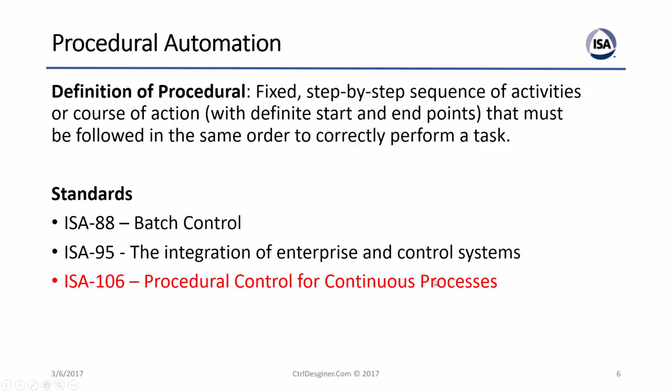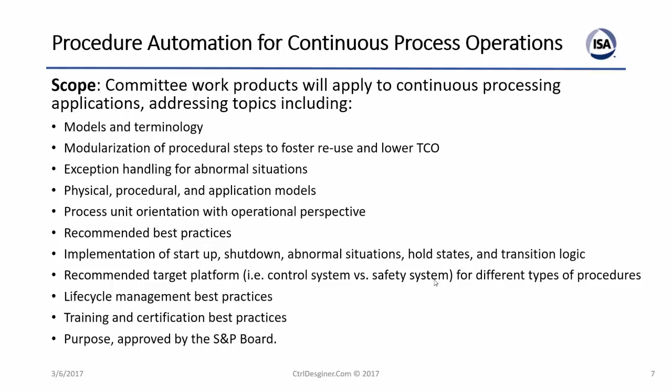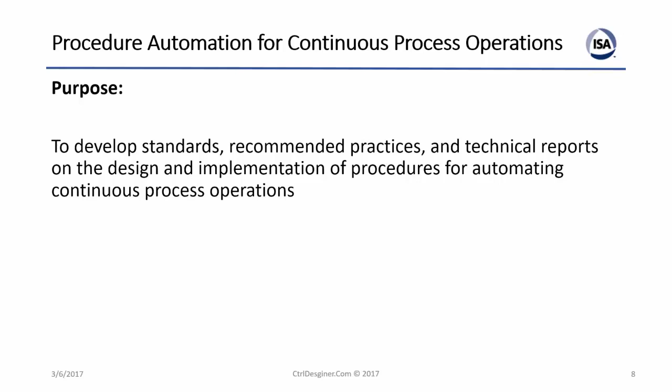And what was the scope of the work? I let you read it. This presentation becomes available, but we wanted to focus on continuous processes, not the batch processes. Therefore, the purpose was to develop standards, recommended practices, and technical reports on design and implementation of procedural automation.

The standard committee consists of myself and Bill Ray, who is the other co-chairman. We have Charlie Green as our secretary and David Emerson as our editor, and our managing director is David Lee. Our past leader, Maurice Wilkins, was our managing director for a number of years, and Marty King was our co-chair before Bill joined us.

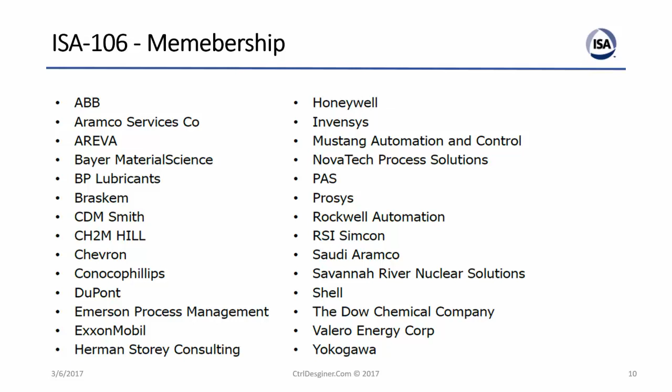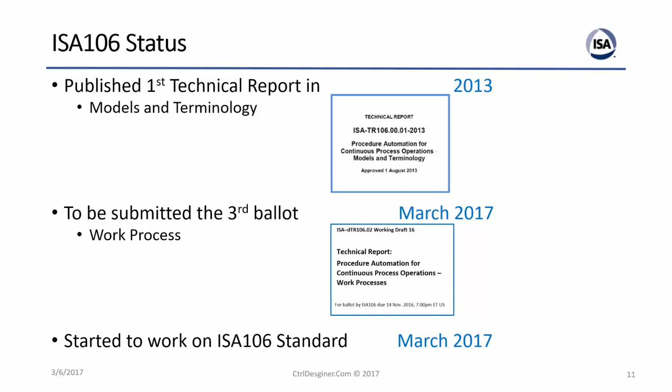We have a tremendous membership from different companies and manufacturers, and what we have done up to now is we have published our first technical report in 2013. Then we are working on the second technical report, which is work process, and it's going to be sent for the 3rd ballot this month. And we have started to work on the ISA 106 standard based on those technical reports and more.

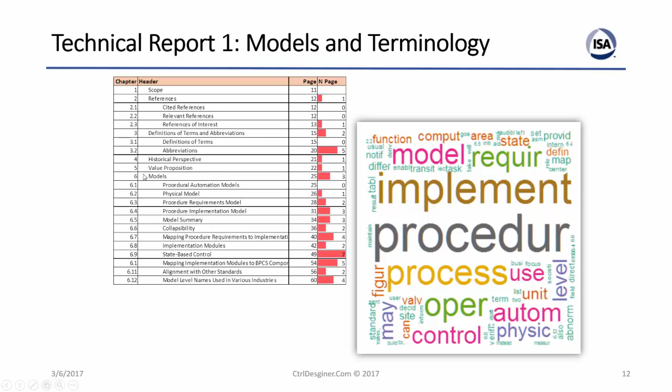Let's focus on technical report 1, which is models and terminology, to figure out how to implement procedural automation. As you can see here, these are the chapters and sub-chapters of the report. And basically, this is our word map of what words are inside technical report 1. And you can see in some areas we have more pages. This shows the page number, and this shows the number of pages for each of the sections. And basically, this report talks a lot about the models and what the models are.

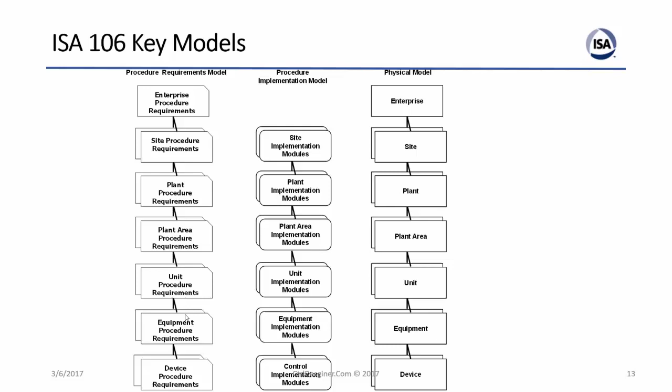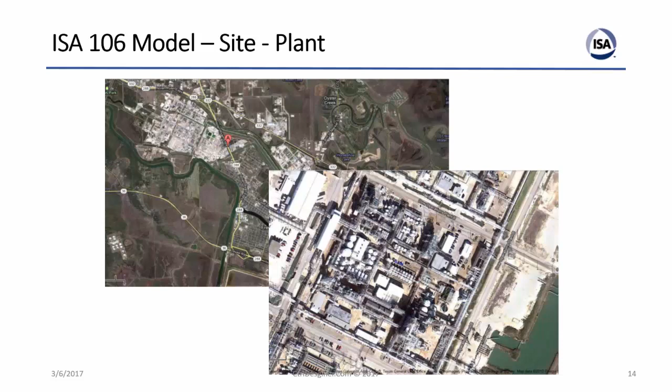We have 3 models: procedure requirement model, procedure implementation model, and physical model. Let's talk about them and see what they are. Let's talk about the physical model. If you look at the map of Freeport from Google Maps and dive into this plant that is being shown here, at the high level we have a plant module, and then we have a plant area module. Then we can divide the plant area model into unit modules, and all of these definitions are provided in our technical report. And then we can subdivide each unit into equipment modules.

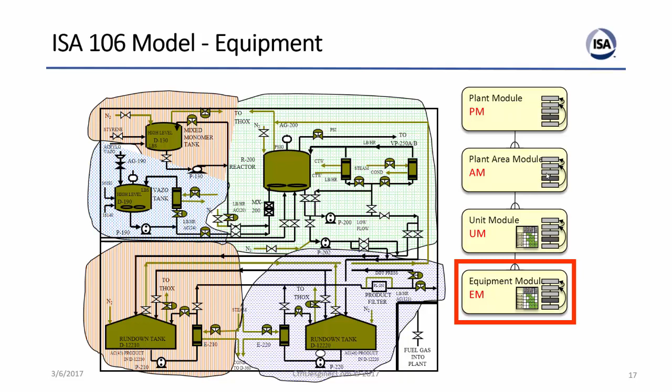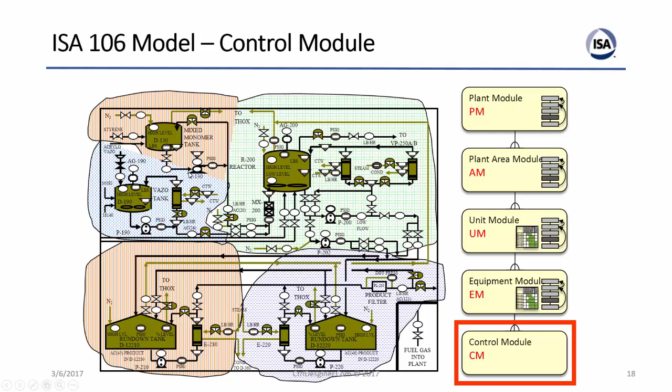And once we have the equipment modules, equipment modules are made of other equipment modules and/or what we call control modules. The control module is the smallest block that the model refers to, for example, a block valve as a control module. The valve and equipment can be a pump with all of its associated I/O. We will talk about these much more in detail.

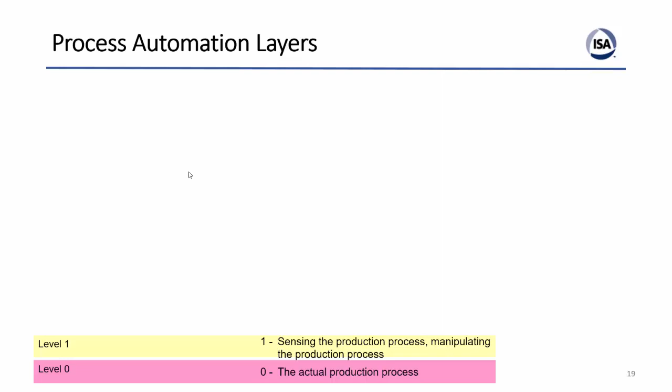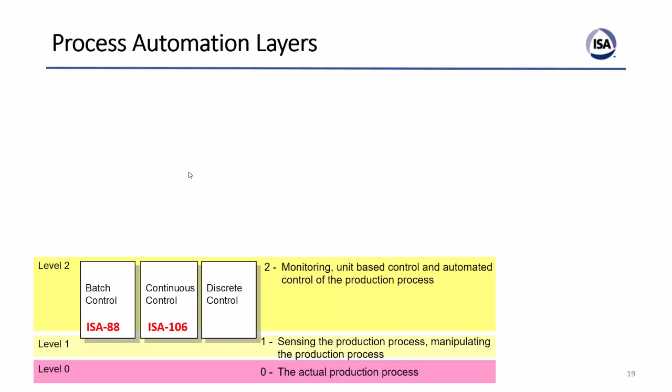If you look at the layers of process automation, the actual process is level 0. Then we have sensors and valves and temperature measurement, level measurements. That's our instrumentation, sensing of the process. Level 2 is where we have process control, and it's divided into batch, continuous, discrete. ISA 88 looks after batch, ISA 106 looks after continuous control.

And then if you go one level up, which is the MOM or MES, it is basically manufacturing operations management. And then when we go one up is business planning and logistics, sometimes referred to as ERP. We are focusing on continuous control in these talks, and this hierarchical system is basically defined by ISA 95.

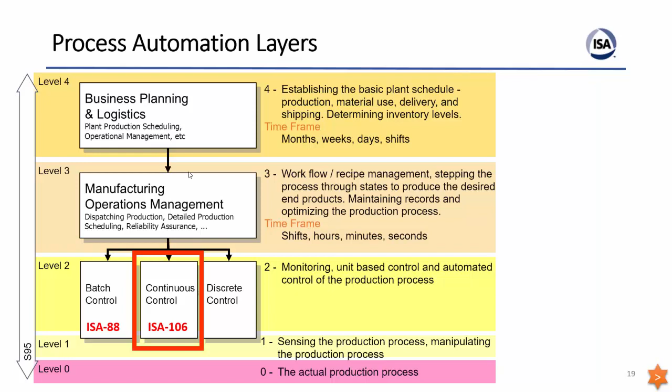But let's talk about batch. Why do we need to have ISA 106 when we have ISA 88? In batch, basically what you can have is a recipe, and you can use unit-based control with a set of steps and transitions. You can make it more complex by having the same UBC but multiple products. Therefore, the recipe becomes very, very important, and we're generating lots of different products.

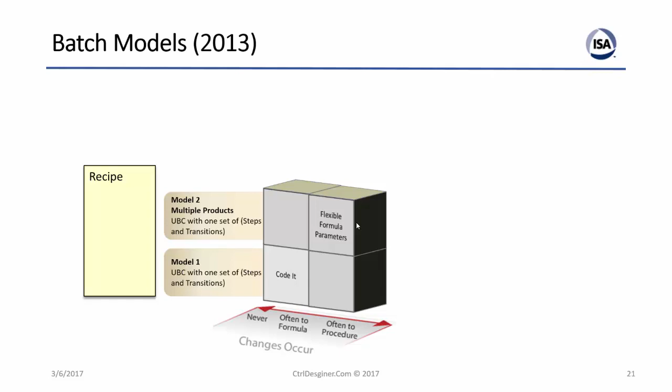We can go one more up, and basically we can have model 3, multiple product, multiple procedure. Therefore, each product has different steps and transitions, and then we need to have a batch manager to manage that. And then 4 is the pathway processing is different. What does that mean? A pump in one production belongs to A, and in another production belongs to B. That's how normally a complex batch is made.

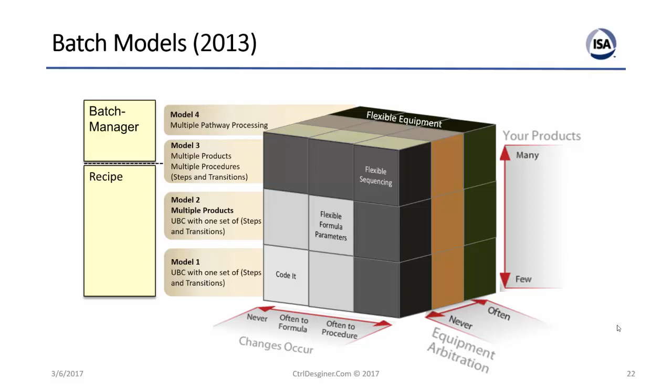Now, if we go forward and talk about the difference between S88 and 106, in a batch, basically the production cycle, if you look at it, is in minutes and hours. We make something and we come back to washing and starting all over again. Sometimes we make more, sometimes we make less. And basically, the production cycle is in minutes or hours.

It's very simple control strategies, pressure control, temperature control, and timing is critical, when you start, when you're going to finish, and then the batch manager commands equipment, not the module. Therefore, the pumps, the valves, are all under the batch manager and the recipe control. And everything is recipe driven and is focused on cycle by cycle optimization.

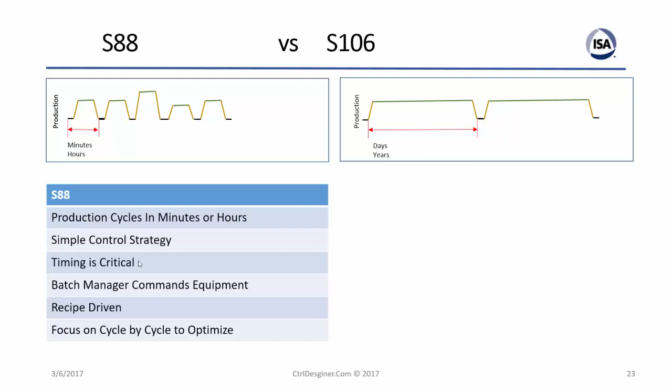Whereas if you look at the continuous processes, normally the startup, running and shutting down is in days or years. Cracking furnaces can go up to 8 years or 10 years before the next startup, shutdown or decoking. It's a very complex control strategy because in an abnormal situation, it's very critical that we don't shut the unit down. And startup and shutdown are critical. They don't happen too often, but you cannot train your operator when your furnace comes down every 8 or 10 years. Therefore, you need to capture your operating discipline as a part of your unit procedure.

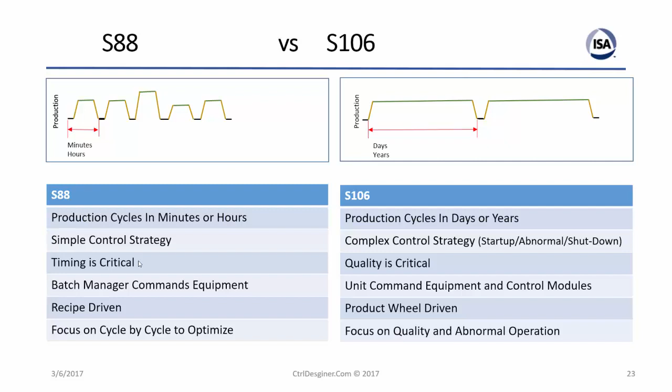Quality is critical. The unit commands equipment and control modules, not the batch manager. And it's product wheel driven. Sometimes in your polyethylene plants, you make one product and then another product, but steps and transitions are the same. Set points might change. And it's focused on quality and abnormal situations.

Therefore, if you look at it, S88 has a batch manager with the UM there, but the UM doesn't do that much. The batch manager talks to EMs, talks to control modules, and talks to equipment modules. Whereas in ISA 106, the UM is basically the driving force talking to EMs and CMs.

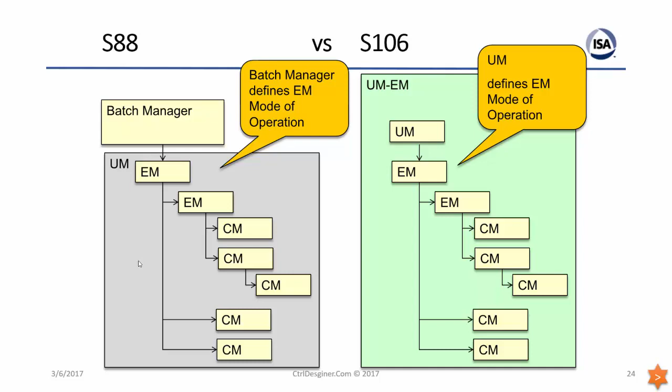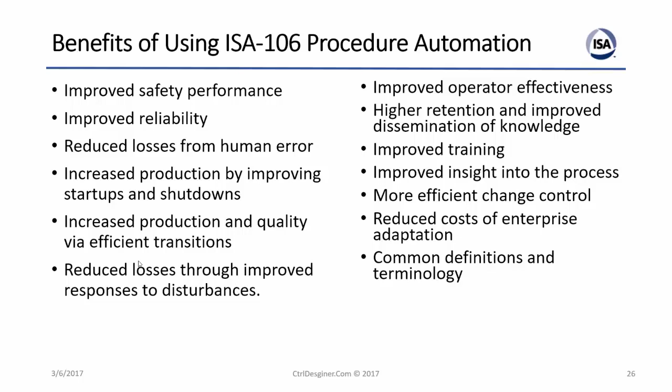Where are the targets for us? Refining, petrochemical, polymer, and furnaces. And there are lots of benefits that we can show, and there are lots of papers published by Yokogawa, ABB and others showing the benefit of implementing ISA 106, and I'm not going to cover those. But let's focus on some principles or requirements for ourselves.

When we are writing code, we need repeatable, optimized startup, run, and shutdowns. Whatever we do this year to start a distillation, 5 years down the road is the same procedure, same timing. We want to do abnormal situation management. If a feed composition changes or if the pressure goes up, we don't want the operator to come and take control. We want the system to take care of it.

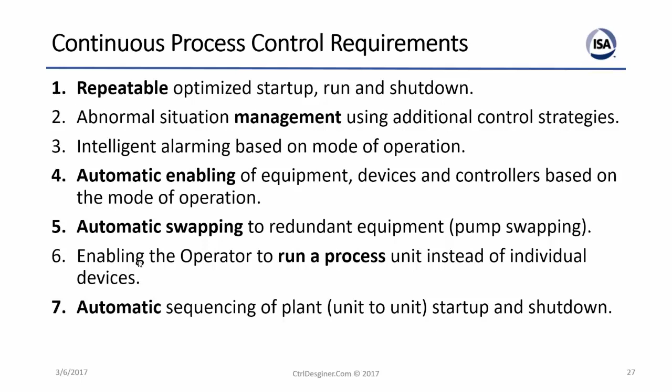We want intelligent alarming based on mode of operation. We want automatic enabling of equipment, devices, and controllers based on the mode of operation. Automatic swapping of pumps, for example. We want to enable the operator to run a process at the unit level instead of individual devices. And we want to do automatic sequencing of the plant. The order is very critical, which one is the most important.

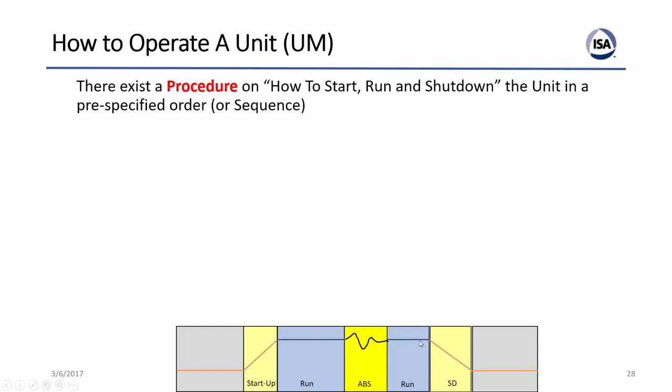Therefore, if you look at how we are going to operate a unit, basically we start it up, we run it, and we might have some abnormal situation. We run it again and we shut down. And this time is months, years.

Therefore, if you look at it, the procedure for how to do this for every unit operation, for every distillation, every furnace exists. We cannot run a chemical plant without these procedures. Therefore, if you go with loop-based control, the operators need to identify when to start, identify these states that we have, then wait for the next steps and execute the command. Therefore, the operator is in charge.

Therefore, the operator needs to worry about all of this, where it is and how everything works. And he or she might have multiple units to take care of. And there is a dilemma. In the old days, we had these controllers mounted on a board. They were very expensive, and we were very limited. Now we have very simple and very good instrumentation. We have a computer to write these controllers, but we still go back to the simplistic controller strategy instead of the one I'm proposing.

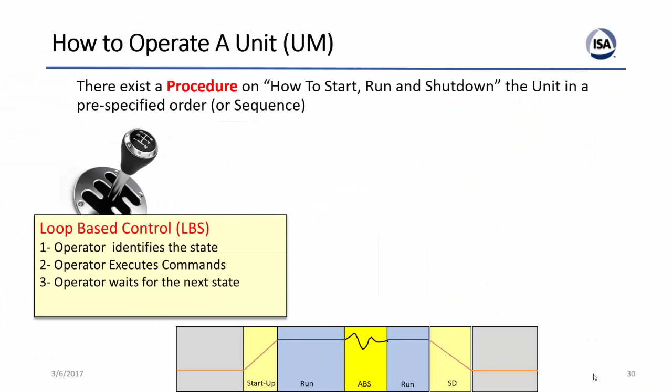The first thing the operator needs to do is establish bottom level. What does that mean? Opening up the feed flow controllers and filling the tower to some level. Then we need to establish heat: add steam to the reboiler and boil the stuff up until we fill this drum, then we set the reflux on and fill these trays. Then we go to total reflux to establish some sort of equilibrium, then we go to run, and then we shut it down. These are the states. States are universal; the definitions might be slightly different, but they exist for every unit.

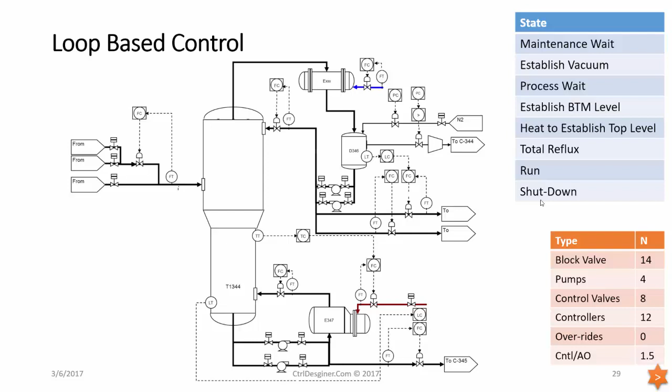Now, another way of looking at this is state-based control, sometimes referred to as unit-based control: the SPC identifies the state, the SPC executes the command, the operator permits predefined transitions, and the SPC observes for the next state. It's similar to driving a car with a stick shift versus an automatic. The automatic defines what gear we are in.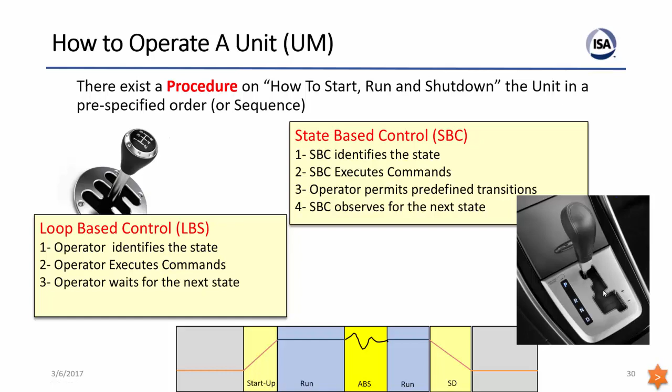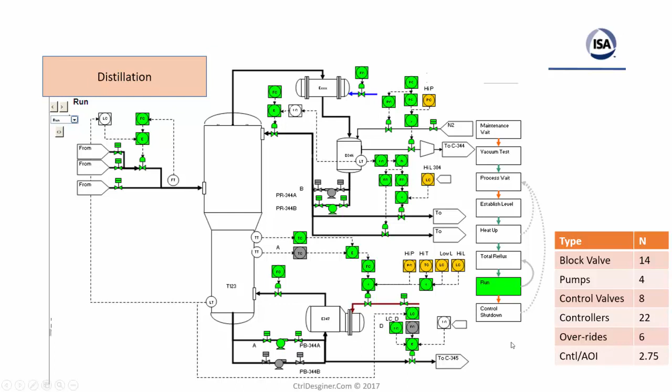Now, this is the same distillation, but implemented with state-based control, or procedural control. It has more controllers. Why? It has 22 controllers instead of the 12 we had before. On a base of 8, we have a 2.75 ratio of controllers to I/O. It would be good for you to check your process and see what your ratio is. Don't count the selectors: number of PID controllers divided by number of control valves.

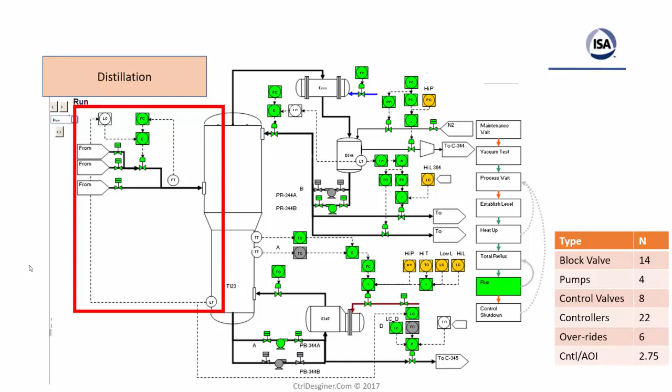So basically we have this complex control strategy, and let's just talk about this one. We're taking the level, and remember, one of the things we want to do is fill the tower up to here. This level signal comes to a startup level controller, which goes to enable selectors and controls the valve. This flow controller is not active at this point. So this is the strategy: an LC startup controller, a feed flow controller, and enable selectors.

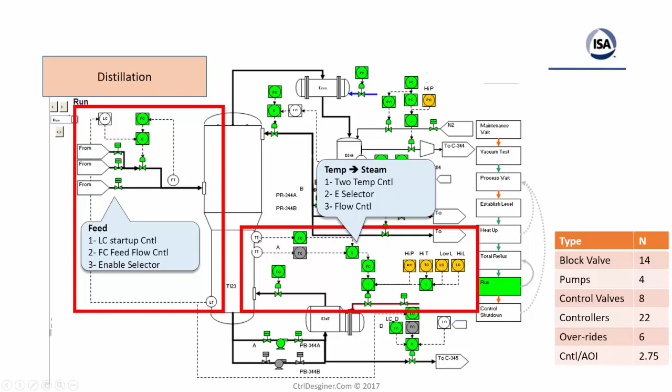What we have here is two temperature controllers. This is very useful because sometimes to control this temperature, if this is our desired temperature, it's very difficult because the top temperature controls the steam and you have lots of instability and problems. So what we do is start with the lower temperature using this enable selector, and then we move up to this one once we establish a better procedure. Then we flow control, and then we control the valve.

Now we have a number of controllers as override controllers for those abnormal situations we talked about. We have a high pressure override - if the pressure of the tower goes up, we cut the steam. We alarm, but we cut the steam. If the bottom temperature goes high, we cut the steam so we don't create polymers there. If the bottom level goes too low, meaning we're evaporating too much based on the temperature controllers and others, then your pumps are going to shut down, so we cut the steam. And if the level at the top goes high, we're going to cut the steam. I have 3 controllers here that go to low selectors, then the result of that and the high pressure goes to a low selector from the flow, and then we control the valve.

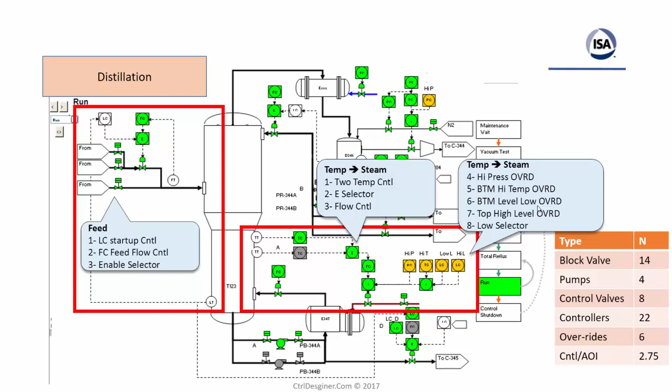These are abnormal situation control strategies that I refer to with yellow color.

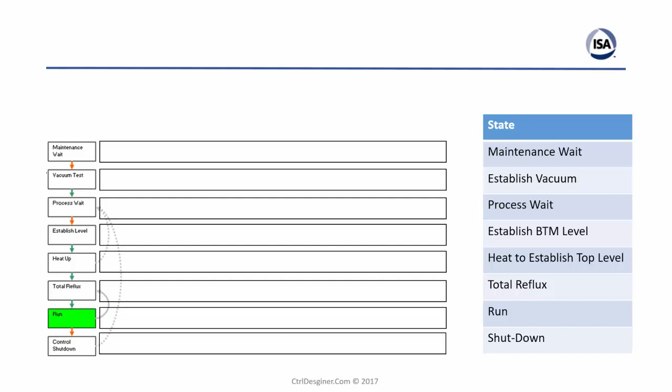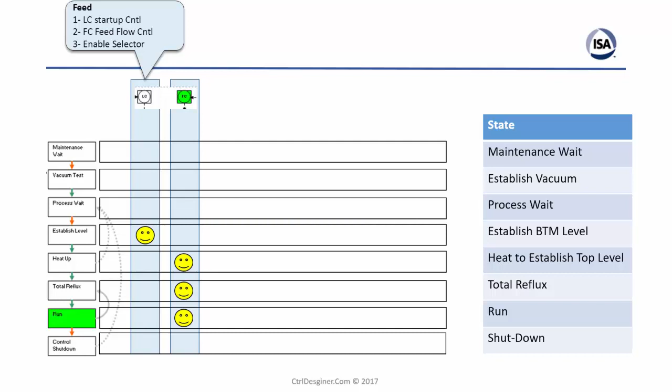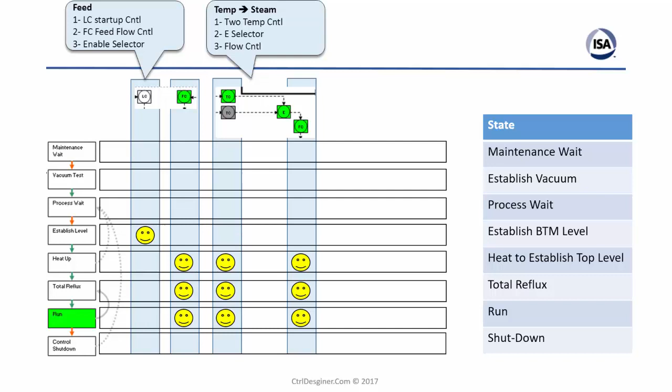Now if you look at the list of states or steps that we have here, and then look at this controller strategy - the level controller needs to be enabled only when we are doing establish level, and then it goes away. The feed flow controller should work during heat up, total reflux, and run. Total reflux - sometimes you don't need it, you need to cut it back, but let's assume everything works. The temperature controllers controlling the steam work all the way through heat up, total reflux, and run. The selectors and flow controllers are basically the same. And all of these override controllers come in at heat up, total reflux, and run, because otherwise there's no steam to control.

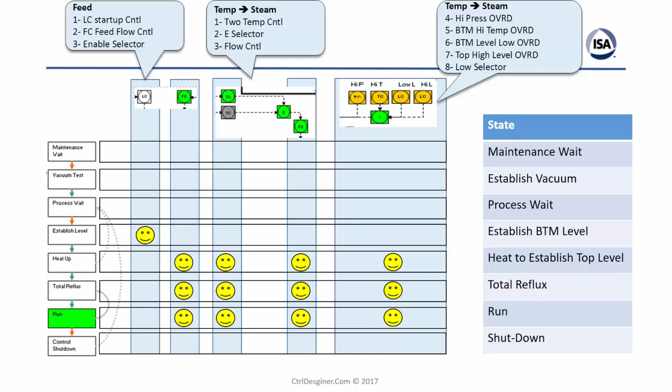Therefore, we need to come up with this matrix, and you'll see an example later on - this matrix basically tells each individual CM or complex CM whether they are enabled or not enabled. The same thing applies for all of the alarms associated with this CM and complex CM.

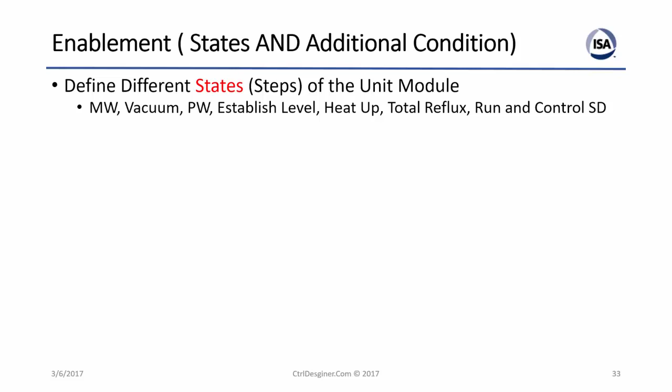Now, how do we do this? How does this enablement work? We need to define different states or steps of a unit module. In this case, we have maintenance wait, vacuum, process wait, established level, heat up, and so on.

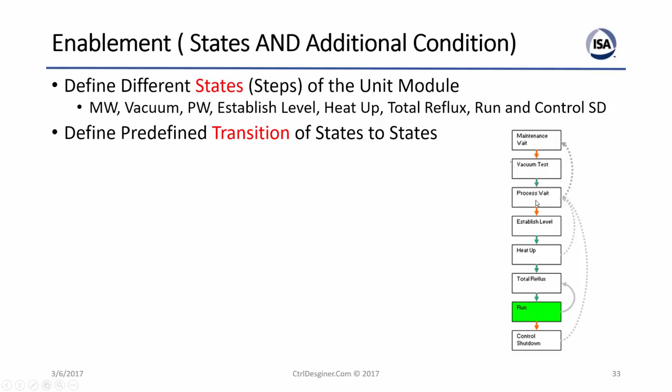Define transitions. So what we have here is we say, from run we can go back to total reflux, and from total reflux we can go back to run. But from run, I cannot go to maintenance wait. From run, I can go to shutdown, but from run I cannot go to established level. There's a pattern - we go straight down, but if something happens in process wait, we can go to maintenance wait. From heat up, we can go to process wait. And from shutdown, we can only go to process wait and then go to maintenance wait. We'll talk about this a little bit more.

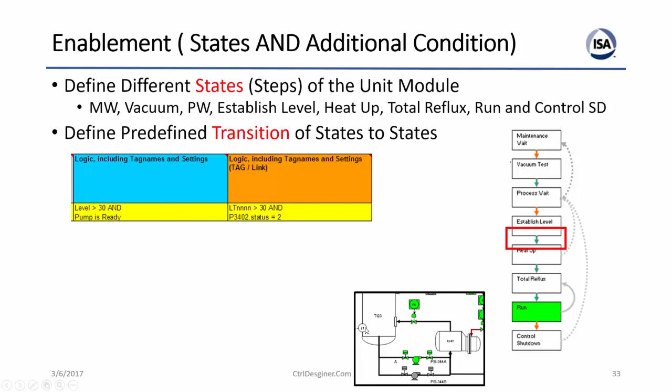The other important thing is we need to identify what the transition is. When we have a step, the transition is basically all of the common logic for all of our pumps, block valves, and controllers that enable us to go from established level to heat up. What does that mean? The level should be greater than 30% and the pump should be ready. If we have these two conditions, the system should automatically go from established level to heat up. So we turn the feed on, we fill the distillation, and when it reaches 30% - simplistically, for 1 or 2 minutes so we don't get noise - then the pumps are ready, and we go automatically to heat up.

And then for each CM's enablement, we need to tell each CM, like this pump or this block valve, at what step you are, because transition is instantaneous. In one second it happens, then it goes off. But we're going to tell this pump that when you are in heat, or total reflux, or in run, you can be enabled. And then we have an additional condition that all of the instruments are okay.

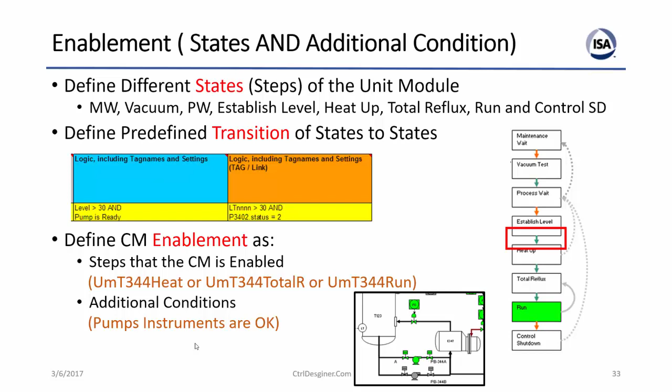Therefore, the enablement of the CMs is divided into two parts: what steps, and then what additional things are needed. If you look at this, that's a step. But then there's another situation where we have steps and then we have an equipment module. Equipment module can have its own steps.

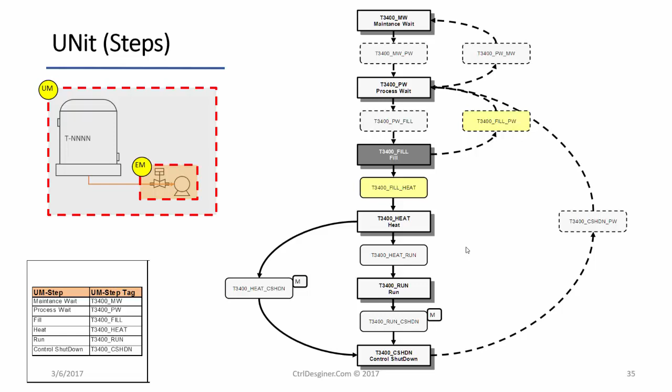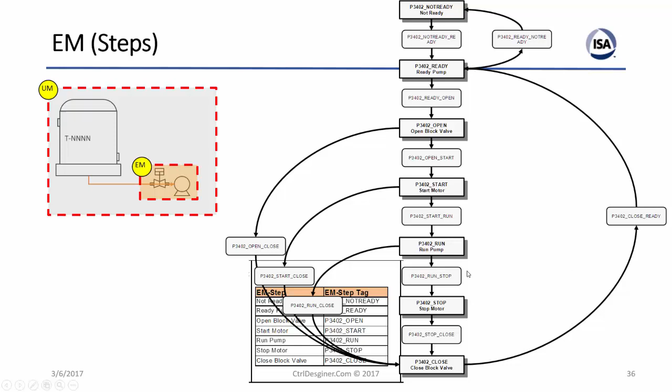Let's look at that. For example, this is a step structure for a tank or a distillation to a pump with a block valve. And this is a step for a pump, because that's different. It says be in not ready, then go to become ready, then open the block valve, then start the pump, then go to run, stop the pump, and close the block valve. As you can see, this is the same step structure that we had for the unit, but now this is the EM.

So what we're going to do is come up with something called mode of operation. We say, what are the modes of operation for the pump? Not ready, ready, run, stop - very simplistic. The steps of the unit decide which one they want. So we have a one-to-one relationship between steps and mode of operation, and the mode of operation has a one-to-many relationship with the EM steps. And then we have feedback.

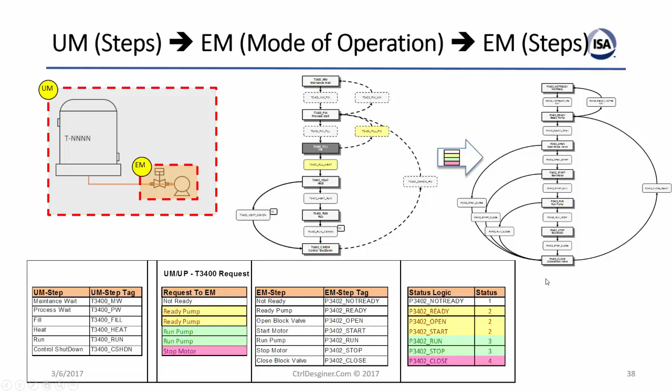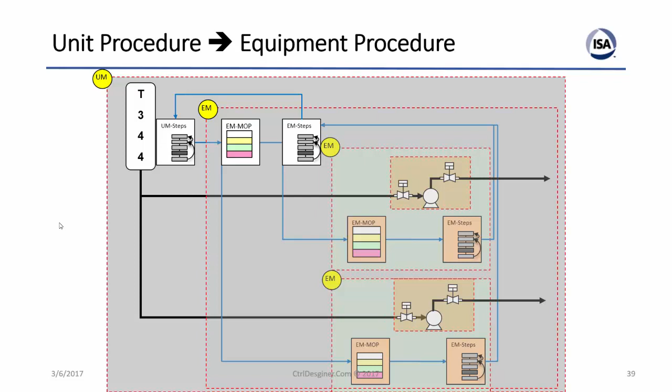Now this way, if we change - for example, instead of having this step commanding this, if we put a dual pump here - everything is easy, because it's the command of mode of operation that changes, not the overall scheme of things in the process control or the steps that we have.

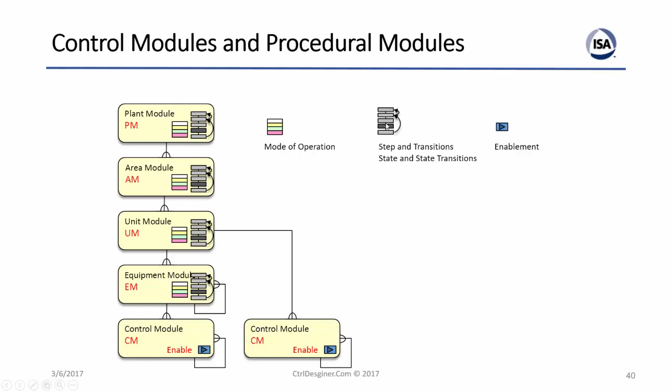So what we're saying is: plant module, area module, unit module, equipment module, control module - and the control module has enablement. This represents steps and transition, mode of operation, and enablement. Let's go through a very simple example.

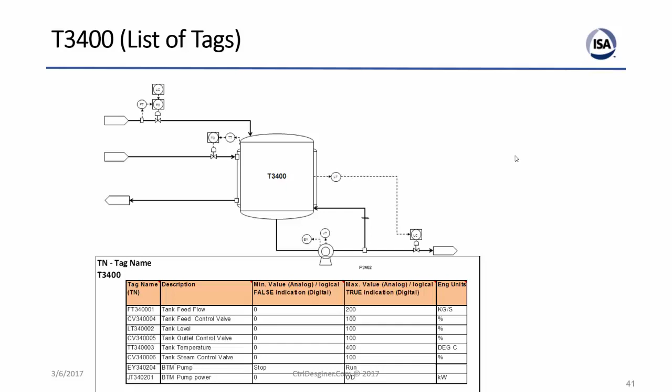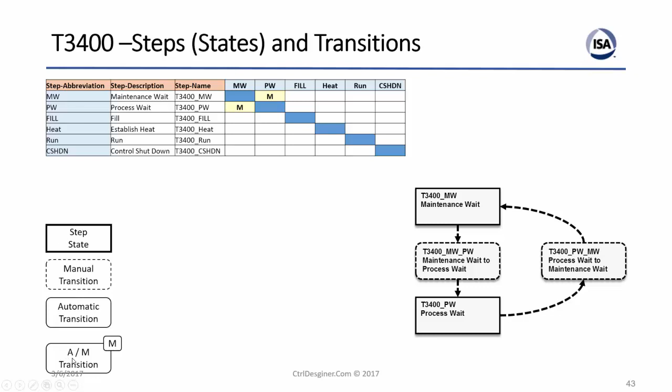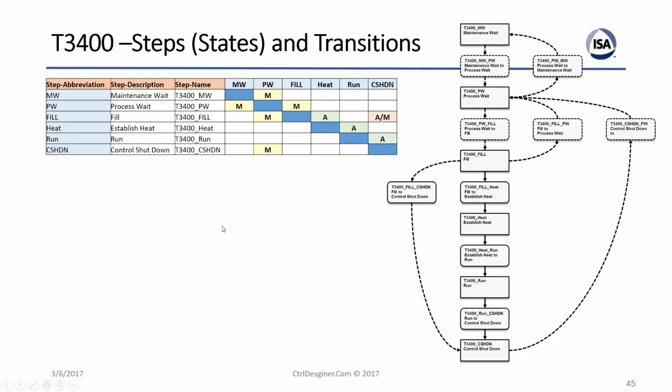Next, from process wait we can go to fill, manually we can go back and up. Here is a more complex one showing how we go from maintenance wait, process wait, fill, heat, run, and shutdown. The slides are available - if you have any questions, you can send a question now or ask me later.

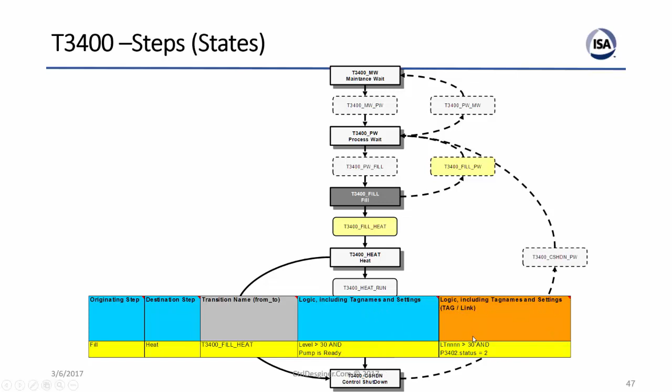So let's look at how these things work in real life. As I talked about, these are the steps. We go from fill to heat - level needs to be above, pump needs to be ready. This is a logical way of writing it, and this is the actual code, in much more detail.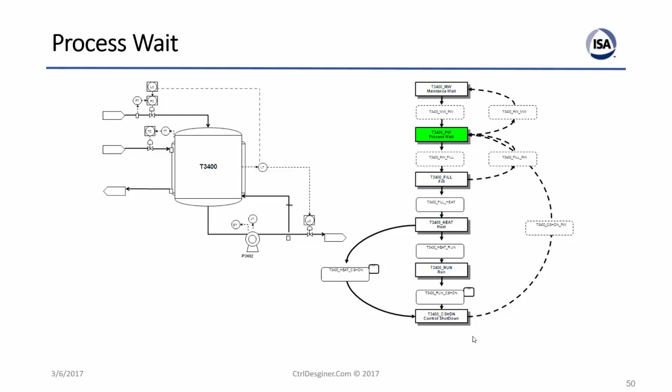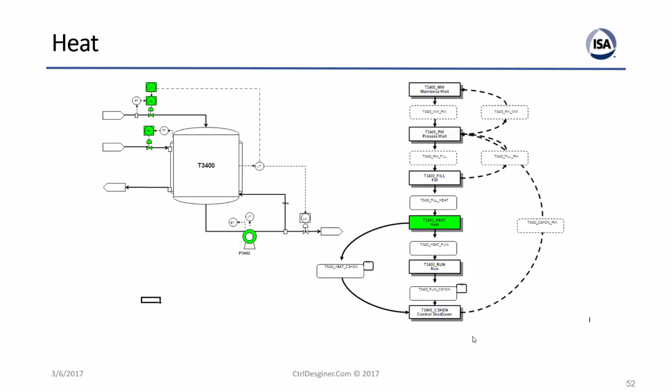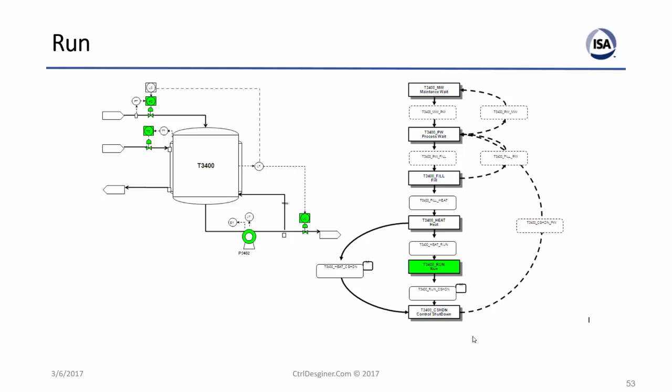Let's start this unit. We are in maintenance wait, nothing is going on. We go to process wait and nothing is still going on. We go to fill, meaning we open the level controller, flow controller, and fill the tank. Then we add steam to the jacket and heat it up. Then we go to run - level control now, instead of controlling the top flow, feed flow is controlling the bottom flow, and the pump is running. Then we shut it down.